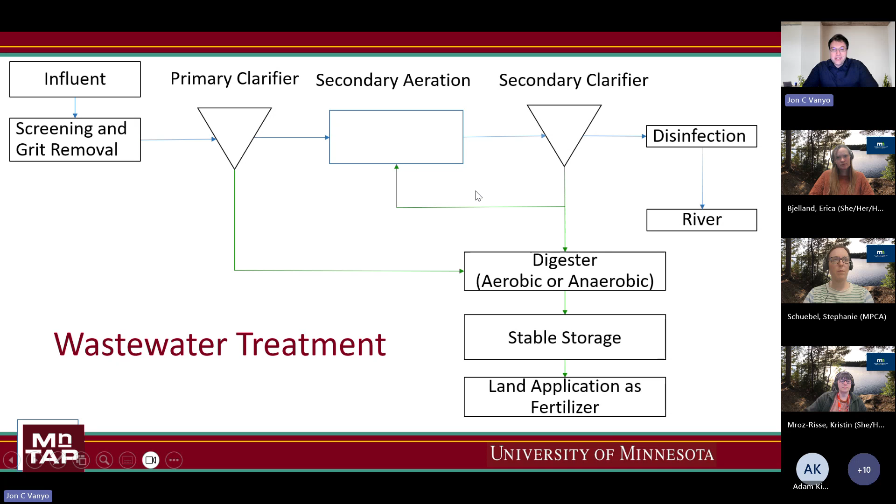So the main place that we focus in our projects was secondary aeration. The main reason is because this process uses most of the energy in the wastewater plant. We talked about it on the last slide, but it is the core treatment process, right? This is where our microbes are using oxygen to break down waste. Oxygen is supplied by huge blowers, usually. We make fine bubbles. And then very importantly, we have something called a DO probe, or dissolved oxygen probe, where we can measure the oxygen concentration in the water, which gives us a really nice, easy way to very quickly understand how efficient this process is from a high level.

At this point too, it's probably worth zooming out for one second. So this presentation as a whole is on wastewater, but in my work, I work with all kinds of industries and businesses, right? And so the processes that we use here don't just apply to wastewater, they can apply to other places too. So the reason we're focusing here is because this is where most of the energy is.

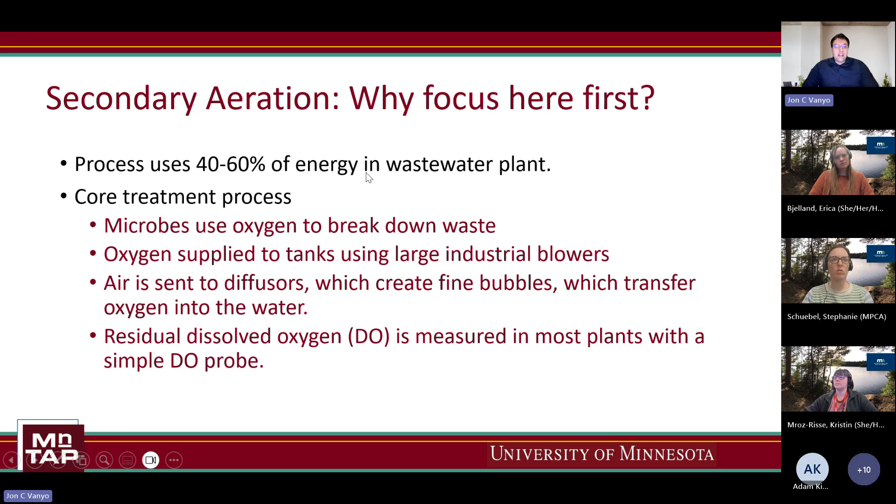For almost all of our projects, especially our intern projects, benchmarking is basically the first step. We need to know where most of your water is being used so we can figure out how we can help you save water, or where's most of the energy, or where's most of the waste. That's a really, really good strategy to figure out where you should focus your effort. And then there's another piece that I'll talk about in a moment. So we'll zoom back in, talk about wastewater, and talk about how much air we need.

So in this process, our blowers are adding oxygen at a certain rate into this tank. That's going to drive oxygen up. And then our microbes are going to consume oxygen, driving oxygen levels down, right? And so when we combine those rates, if your residual oxygen is above zero, your microbes have enough oxygen to break down the waste. But typically, we're going to keep our residual oxygen level a little bit higher than that. And this will give us a little bit of a buffer.

The point of the buffer is if we get what's called a slug load from industry, let's say there's a cleaning process at one of your food processors and they send a lot more waste than normal. You want your system to be able to react before it runs out of oxygen. So you want those blowers to be able to turn up, send more air to treat more load. And so having a little bit of buffer is good.

The other reason why it's okay to do that here is because it's harder to add oxygen to your water the more oxygen that's already in it. So going from an oxygen level of 1 to 2 is relatively easy, whereas going from a 5 to a 6 is much harder and needs much more energy. So it's relatively energy inexpensive to have a bit of a buffer.

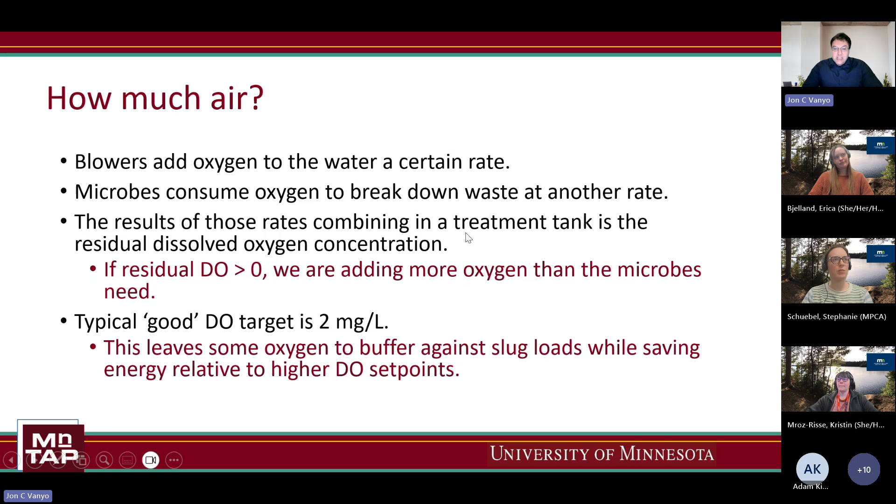Okay. So then the other question worth asking here is why is there so often opportunity to reduce DO? When I started doing this project about 10 years ago, about every single plant we went into had oxygen concentrations that were much, much higher than 2 milligrams per liter. And at the time I was so confused, I didn't understand it and I didn't know what was going on. And it really took me a while to get it.

But the reason for this is because wastewater plants are usually designed with about 30 years of city growth in mind. And this is very intentional and it's by design. So if you're on the city council, you can't just build infrastructure to meet your needs today. You need to meet your needs today, plus you want to have room for your new businesses and your tourists and your new people to come into your town. And so in order to do that, you have to build your infrastructure to be a little bit bigger than you need it today.

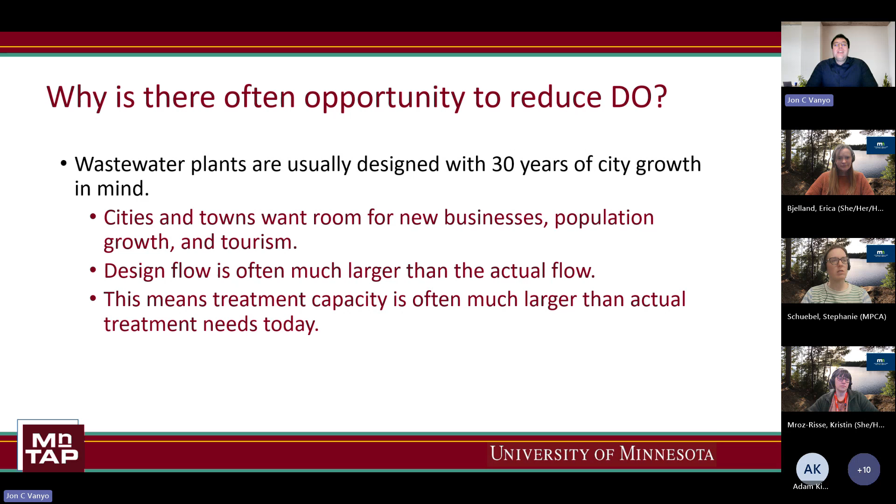And essentially what that means is if you're an operator and you go in and you turn on your equipment, it's going to work. It's going to treat your wastewater, but it's going to have much more treatment capacity than you need today. So the final question here is, well, what do we do about it? How do we actually save the energy? We know what the issue is. How do we save it? So there's a few methods we typically use in the project.

The first one and the main one is something called a variable frequency drive. So the idea here is you can connect this to your motor and blower system, and this allows you to essentially just turn down the speed. So instead of just having your blower be on or off, now you can have it running at 80% speed or 60% speed or whatever you need it to run at.

Usually for positive displacement blowers, and I'm not going to get into the details here too much, you can go down to about 50% speed with a VFD, which is quite useful and can help you save a lot of energy. Now, sometimes a VFD isn't going to be the right option.

The main reason why it wouldn't be enough is if there's not enough turndown on the VFD to get your oxygen level where you want it. And so even with a VFD, you're still using way more energy than your process actually needs. In that case, sometimes the best option is to actually put in a smaller blower. You still need to leave your other equipment there, and it needs to be ready to go because you need to be able to treat your design load, but a smaller blower can sometimes pay for itself when the equipment is really oversized.

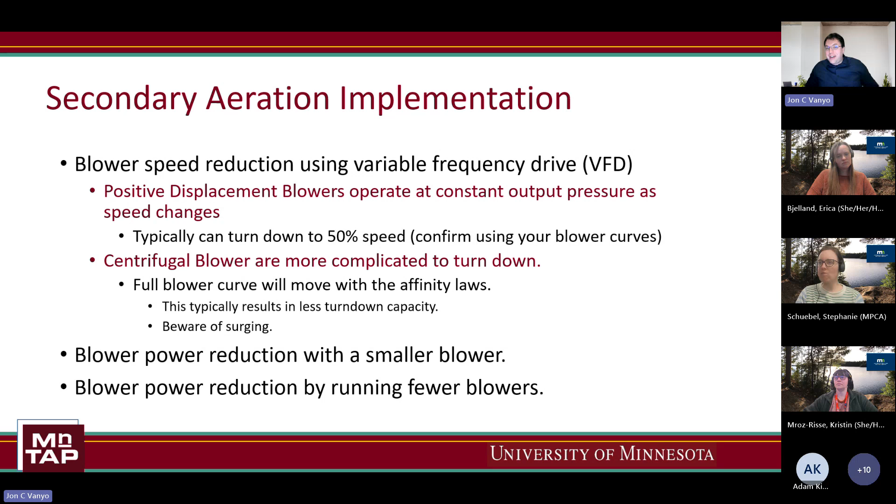Another relatively common option, something that we've seen a few times at least, is at wastewater plants you'll often see sites have 3 blowers, and 2 of them are on at any given time and the third one is redundant. Sometimes when we run the math on the amount of air that's needed, we find that they can actually get away with running 1 blower on and 2 blowers as redundant. And that can be a very nice low or no cost way to save a bunch of energy when it works.

So this little table just shows the savings that we found from secondary aeration projects over the past 10 years. Now, only about half of that time we were doing energy projects; the other half we were doing nutrient projects. But you can see some pretty nice implemented savings numbers, about 5.8 million kilowatt hours per year and about $450,000 per year of cost savings. So definitely some good opportunity that we found here in Minnesota.

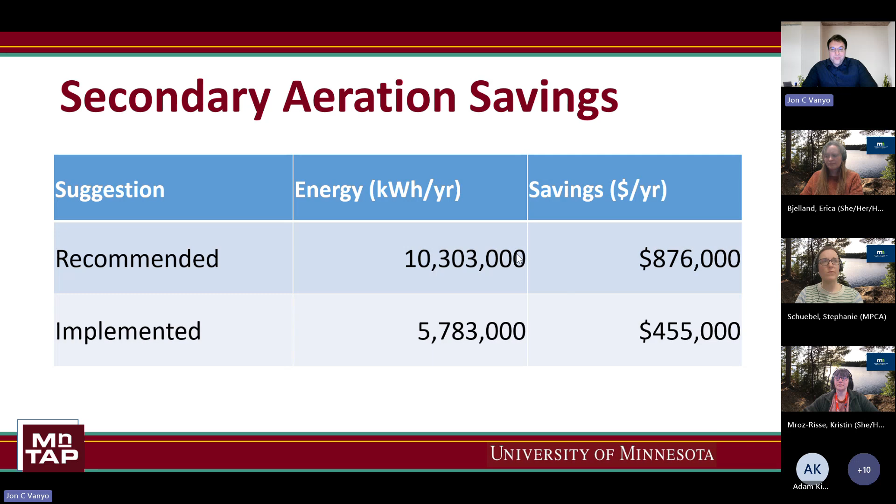Okay, so that's what I have on energy. I'm going to move along now to nutrients. This was how we spent probably the other half of our time in wastewater treatment, looking at biological nutrient removal. Before I get into that, I do want to talk about what nutrients are and what nutrient pollution is. When we talk about nutrient pollution in wastewater, we're specifically talking about nitrogen and phosphorus.

These are both agents of growth. The idea is if you send too much nitrogen and phosphorus into a body of water, it will essentially cause your algae to grow and outgrow the carrying capacity of the body of water, choking out the oxygen and creating what's known as a dead zone. We would like to avoid that, and so we would ideally treat for nitrogen and phosphorus and reduce this nutrient pollution.

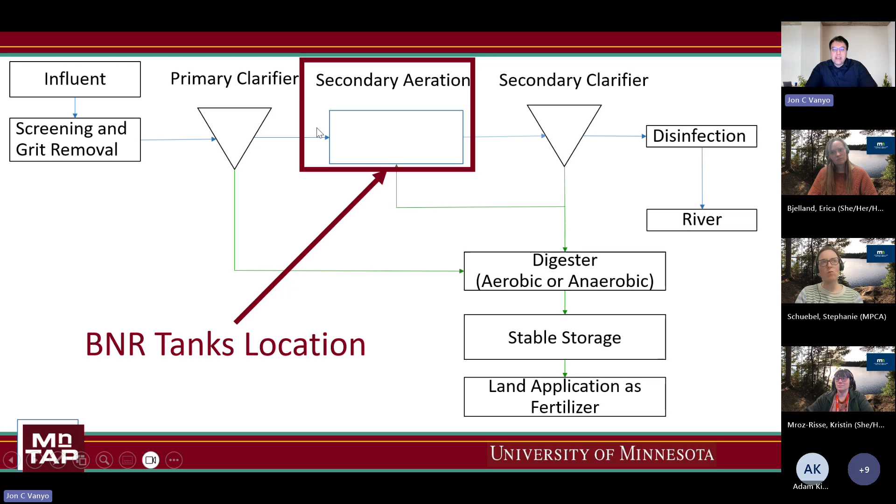So this is the same diagram we showed before, but this is just showing you where the BNR, the biological nutrient removal tanks, would go, right? So you would end up putting them between the primary clarifier and the secondary aeration tank. You'd have two tanks here, and then the secondary aeration tank is part of this process as well. So these are the three tanks you would want. You want an anaerobic tank, which you can think of as your phosphorus tank, an anoxic tank, which you can think of as your nitrogen tank, and then an aerobic tank, which everyone already has, but this is where we break down our BOD and break down our NH4.

So I'm going to talk about each of these pretty briefly, but I'm going to actually start with tank 3 here and we're going to work our way backwards. And the reason for this is because if you'll notice, there's a recirculation loop from tank 3 to 2, and then there's a recirculation loop between tank 2 and 1. And following the recirculation loop is just the easiest way to understand what's going on.

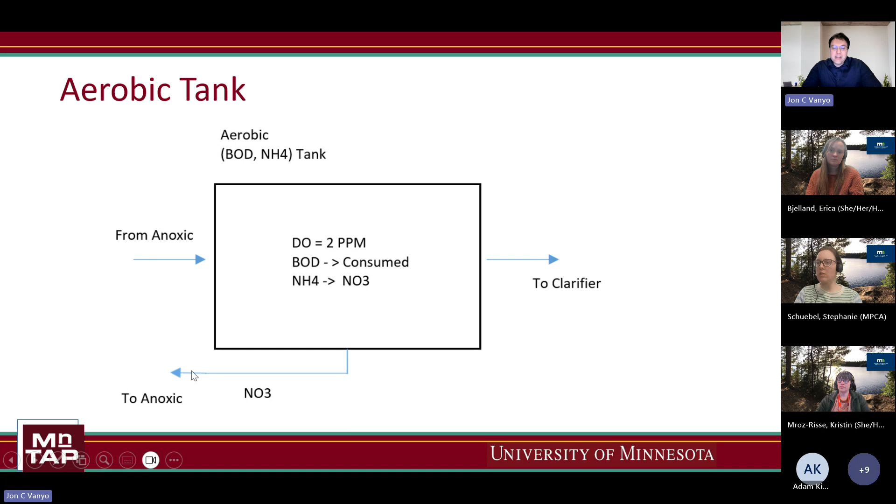So starting in tank 3 here, this is again our aerobic tank. We already have this tank. We have oxygen in here. Our BOD is getting broken down, and we're breaking down our ammonium into nitrate. This is already happening. Great. Key thing to take here is in this process, we are recirculating water containing nitrate back to our anoxic tank.

Okay, so let's go to the anoxic tank now. In this tank, we're not adding any oxygen, but we are, again, sending this nitrate back. So what's going to happen here is our microbes, they want oxygen. They can't get it from the water because there's none in the water, but they can pull it off of this NO3 and make nitrogen gas. That's exactly what they're going to do. And that is how you get denitrification. If you need nitrogen removal at your wastewater plant, this is the process the plant's going to do.

Relatively straightforward. Okay. Then if you want to get phosphorus treatment, you're going to need one more tank, usually. And so then you're going to send another recirculation line back to what we call our anaerobic tank. And keep in mind now, this water we're sending back doesn't have oxygen in it, and it's not going to have much nitrate either because we just treated for that. So there's really very little oxygen at all.

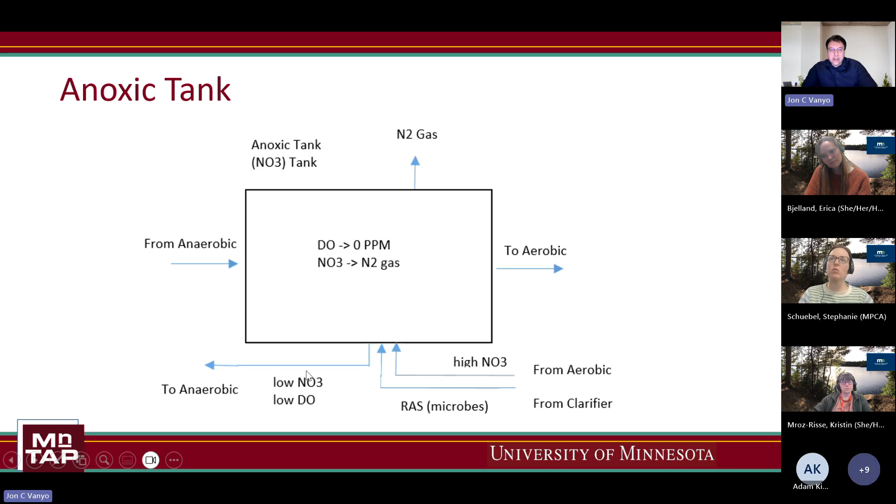Okay, so then the final tank here is our anaerobic tank. And it's the first tank we see after influent. And that's important because anaerobic microorganisms are what we want to grow. The specific one is a PAO, a polyphosphate accumulating organism. This is the one that will uptake phosphorus for us. But in order to get it to grow, it requires these anaerobic conditions.

And the main reason, the easy explanation, is the aerobic microbes will outcompete the anaerobic microbes. It turns out if you can use oxygen for your respiration processes, you work faster, you move faster, you do things faster. So we specifically need a tank with no oxygen and a lot of BOD, a lot of influent waste, to get these things to grow.

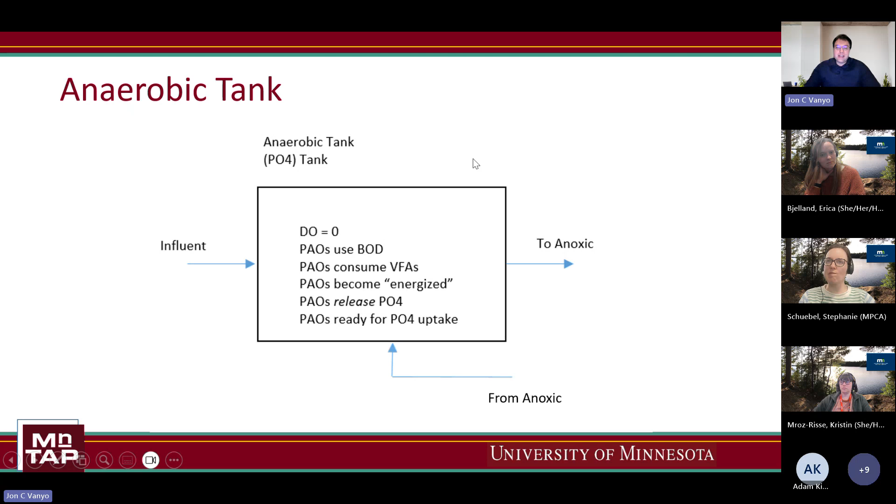But as long as we give them the conditions to grow, they will grow. And once we have the concentrations that we want, they're going to just flow through our process all the way back to our aerobic tank. And the last thing happening here is in aerobic conditions, these anaerobic microbes we grew are going to uptake that phosphate for us right before the clarifier, and then they'll be able to settle out in the clarifier. So that is BNR in a nutshell.

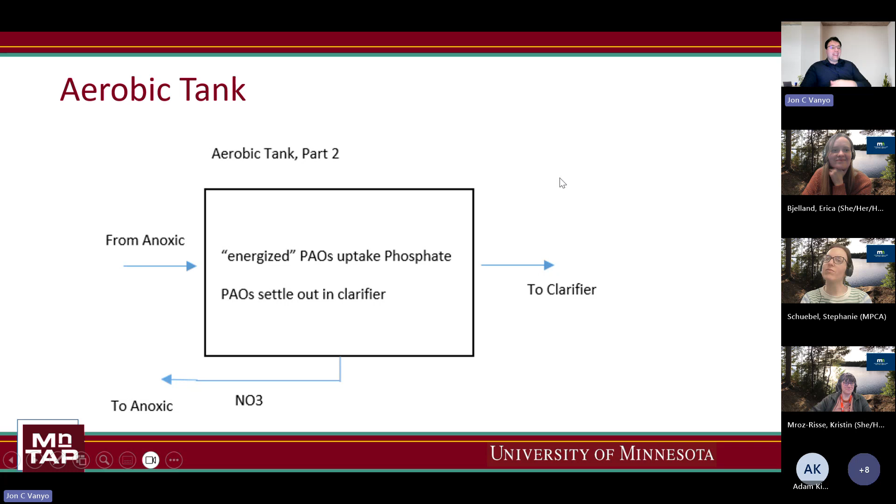If I lost you, I apologize. It is a little bit dense, but we're gonna get into more fun conversations coming up here.

So last thing to mention here, though, is there is a complication with biological phosphorus removal. These organisms uptake phosphorus in aerobic conditions, but then they re-release it in anaerobic conditions. This is more of a 201 topic, but as a wastewater operator, often what you're doing with your solids is trying to consolidate them and remove water from them. And when you remove that water, you send it back to the head of the plant. If your phosphorus happens to have released before you do that, you end up sending a bunch of phosphorus back to the head of your plant. So that can be an issue.

Now, this isn't something I studied in depth. I know there are plants who have figured out how to have those PAOs hold on to that phosphorus all the way through their process. And there are other plants that do something called side stream treatment, where they take this very high concentration phosphorus water and treat it more efficiently to get the phosphorus out. But again, I'm not an expert in all the details here. It's worth knowing that this isn't quite as easy as I would wish it were.

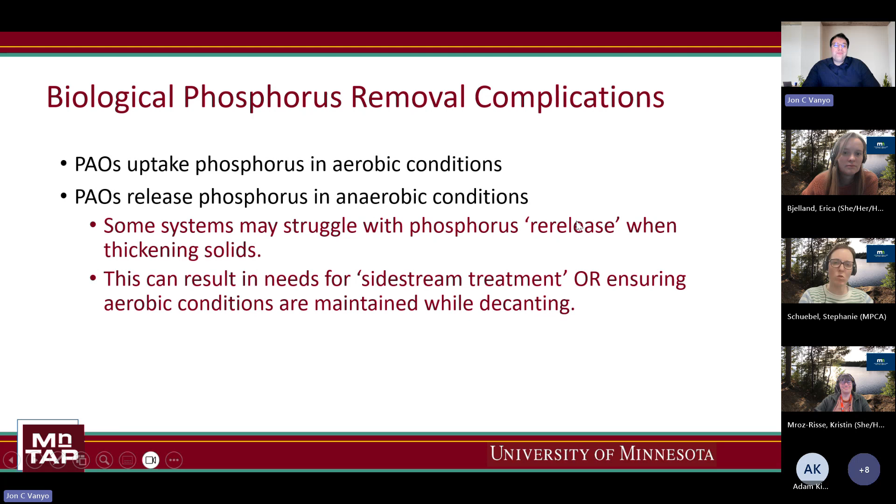I guess the last thing to mention here too is there are a couple of software programs for biological nutrient removal. My team used ASIM, Activated Sludge Simulation Model. There's also BioWin. These are great. They let you model your whole plant, all your flows in and out, all of your recirculations, and they can help you tune your treatment process to get whichever nutrient you want to treat for.

Something we learned over the course of our project is a typical plant doesn't have enough food for the microbes to get full treatment for phosphorus and full treatment for nitrogen. So oftentimes you can either get some treatment of both or really good treatment of one or the other. This kind of modeling software can help you figure out where you want to be and how you want to use the limited energy supply you have to give to your microbes.

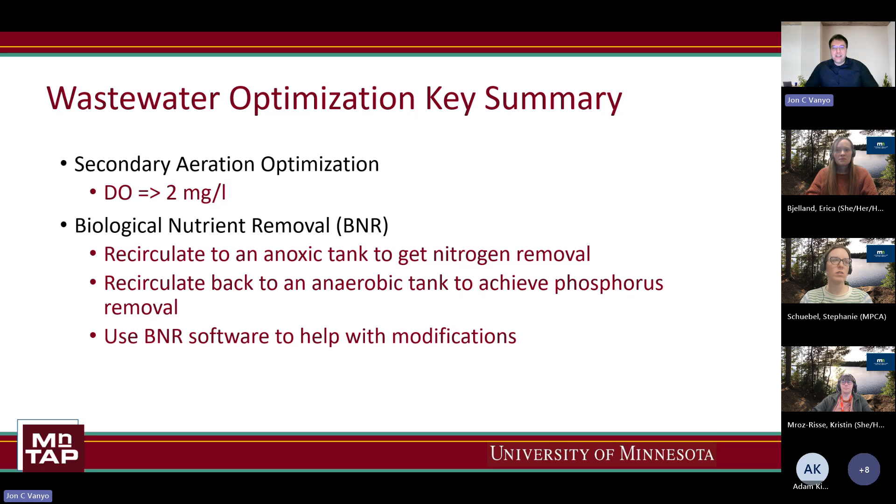Okay, so that's what I have for wastewater. On the energy side, keep your dissolved oxygen at 2 milligrams per liter. You'll save a bunch of energy. On the BNR side, recirculate back to an anoxic tank and you can get nitrogen removal. Recirculate back to an anaerobic tank and you can get phosphorus removal. And you can use software to help you figure out the details of the configurations. Okay, cool. Let's move on to the intern program.

Thank you for sitting through that piece. I know that was a little dense. Some of the wastewater operators love it, but this group may or may not have. But anyway, more fun topics coming up.

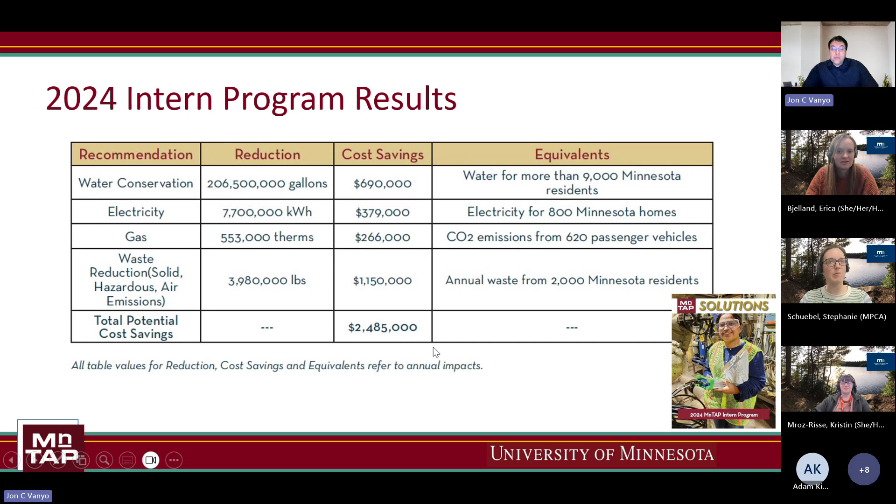So these are results from our 2024 intern program. Our students do awesome work. They save tons of water, energy, gas, waste reduction, almost $2.5 million of potential cost savings. Usually about 1/3 of what we recommend gets implemented at MnTAP, but that still represents a really nice chunk of change for these businesses who are part of our program.

So what I want to do here to kind of wrap things up is I want to just tell you a little bit about the 3 intern projects that I mentored last summer. I had tons of fun mentoring these projects. They're great. The students are great. The sites are great. They're a lot of fun. And so I kind of want to just tell you a few minutes on each of them.

Okay. The first project was with Minncor Industries. So this is an industrial laundry facility. It's located at the Faribault Correctional Facility. So the idea here is they employ 73 people, 62 of whom are incarcerated persons, IPs. And it really gives these people a nice opportunity to get some work experience prior to getting back out into the real world. They provide laundry services for about 27 clients in the area and process 3.5 million pounds of laundry per year. So that's a pretty big workload that they have.

Okay. So the project that we worked on. So Richard and I went up to the site to try to figure out, okay, how do we help them make this process more efficient? And the main thing we found is the site uses high pressure steam to heat the washers and heat the dryers. So they need a lot of heat for this process, of course, so they use steam.

Great. What we found is that once you've used the heat from the steam, you make high pressure condensate, then you need to flash that, you need to remove the pressure from it and turn that into low pressure steam. And this is supposed to go to a heat exchanger so we can recapture that heat value and send that condensate back to the boilers. Unfortunately, at this site, this heat exchanger wasn't functioning. And so this low pressure steam, it was just going out the window. It was fascinating to visit and watch this, actually.

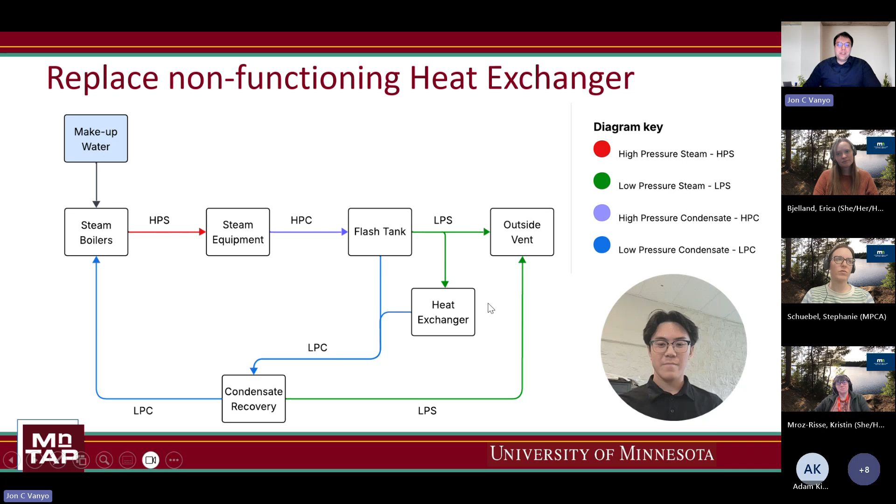So Richard was able to run the numbers on this heat exchanger and found it was a little over 400,000 gallons of water per year, almost 33,000 therms per year of fuel, and about 11,700 pounds of chemicals they would save by basically being able to reuse that condensate and not have to redose that with chemical, for annual savings of about $32,000, 1.5 year payback.

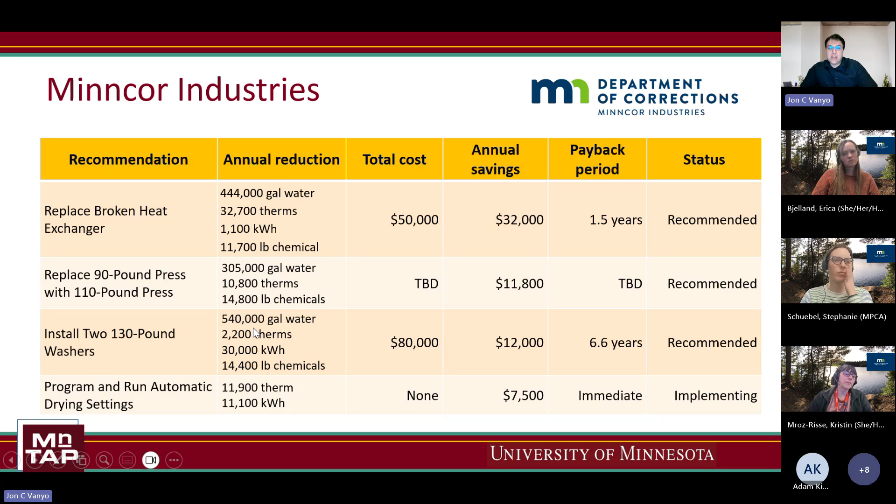Very, very cool. I'm just going to talk about the main projects I have my students work on, but you can see they always have additional projects they're working on too in the background. So in this case, he also helped them spec out some new, more efficient washers and also lean their pressing and washing process. So a lot of great things happening with this project.

Moving along, the second project I worked on was with the Hennepin Energy Recovery Center. This is our big waste energy facility in downtown Minneapolis. Generates electricity to serve over 25,000 homes. That was fascinating to me. I had no idea it was that much energy.

So the projects we worked on here, I specifically remember scoping this project because we kept talking about the common efficiency opportunities, and it was like, oh, they've already done that. They've already done that. That's already efficient. Great. And the final thing we were able to find was within their cooling tower loop, we decided to dig into their cycles of concentration.

And so essentially the overview here is for this kind of process. So we're creating energy through incineration here, right? And so we need to cool down the equipment with cooling water just to make sure it doesn't melt, it doesn't deform, and it stays within useful parameters, right? So we use a bunch of cooling water for that. And then to keep the water cool, we send that water into a cooling tower, some of it evaporates, and that cooling effect cools the rest of the water.

Now you can imagine as you evaporate water out of a cooling loop, you're going to concentrate any minerals in that water. And that will continue becoming more and more concentrated until you balance it out with something over here called blowdown. So then we're basically going to send some water and also the concentrated minerals out of our system to wastewater.

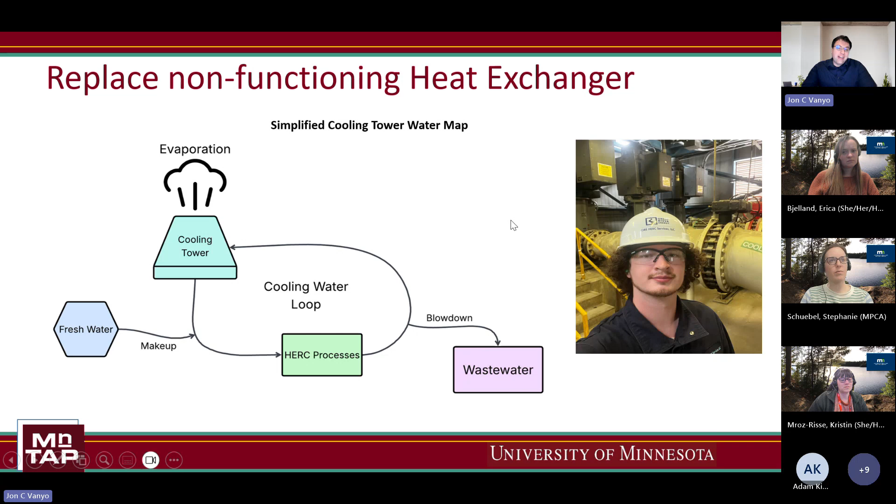So increasing the cycles of concentration ended up saving them 12 million gallons of water per year and 50,000 pounds of bleach per year, for annual savings of about $50,000 and a 0.3 year payback period, which was so cool. It was so great to find, especially on a project like this where we went in not knowing what we were going to find exactly. It was so great to find this much savings potential.

And then Xavier was also able to help them get their stormwater reuse system back up and running properly to save another 1 million gallons of water per year. And he found a way to reuse water from their newest piece of equipment, a new chute cooler, which had single pass cooling water, and we were able to reloop that back into their cooling loop as well. So very, very cool water savings project here.

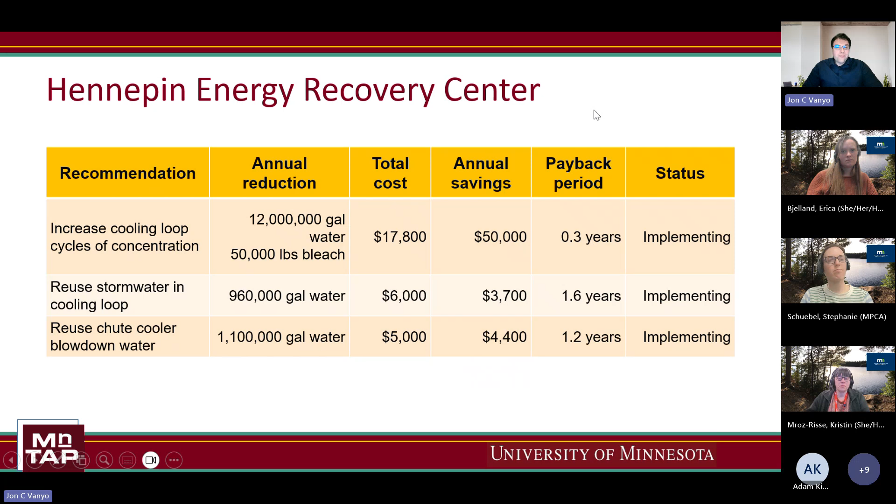And then the final project that I mentored last summer was with Bailey Nurseries. So this is a wholesale plant nursery. They basically grow potted plants for landscaping purposes. And they have facilities all over the place: Minnesota, Illinois, Georgia, Oregon, Washington. We, of course, just worked with the facilities in Minnesota. Claire and I worked on this project, and our project was to help them figure out how do we reduce irrigation water to save water?

And it was so interesting because all summer we kept developing ideas, and we had a project team with folks from Bailey as well. And we were kind of brainstorming, and we learned there are different water classes, A, B, C, D. And so some plants need more water, some don't need as much. And we kind of got through that. And then eventually near the end of the project, we realized all of these plants are potted plants. And what that means is that the amount of water you can add at any one time is limited by the amount of soil in that pot.

And we noticed that a lot of the baseline irrigation settings were having more water than we would want running through the bottom of those pots. And so we were able to do our calculations based on pot size and amount of soil to get the correct amount of water, such that you do want a little bit of leachate coming through your pot, but not too much. And then those plants that needed more water, we would have to water them more frequently to make sure they got the water they needed.

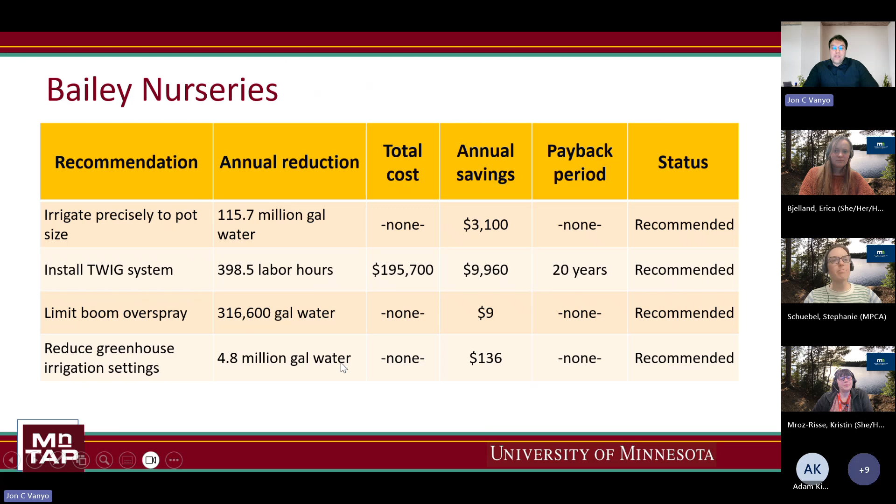And so this project had huge savings. For the greenhouses, it was 4.8 million gallons of water savings per year. And then when we applied the same math to the acres of outdoor potted plants they're growing as well, the savings there was about 115 million gallons of water. So some huge water savings here. And again, it was a really nice, fun project to work on last summer. So that's kind of what I have for you.